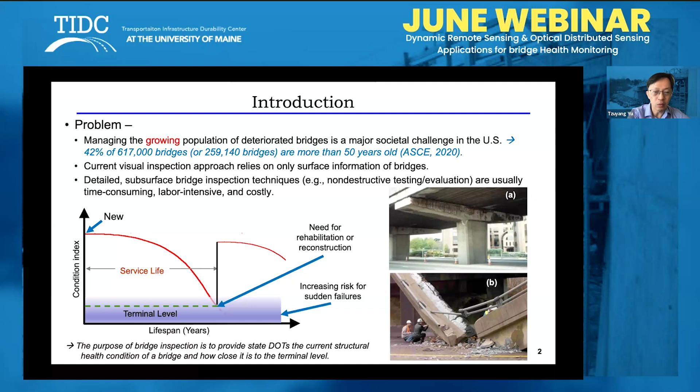Nonetheless, pictures show on the slide that in 2005, this Lakeview Bridge actually collapsed unexpectedly. So that means we could do a better job with infrastructure sensing, because as researchers and also for the stakeholders, the condition of our civil infrastructure was not properly controlled or known by our stakeholders.

Therefore, bridge health monitoring is a very powerful and beneficial technique that can help these governments to reduce the risk of these kinds of failures, as well as help structural engineers improve their design knowledge. Shown here are just a number of applications that we can learn by using bridge health monitoring.

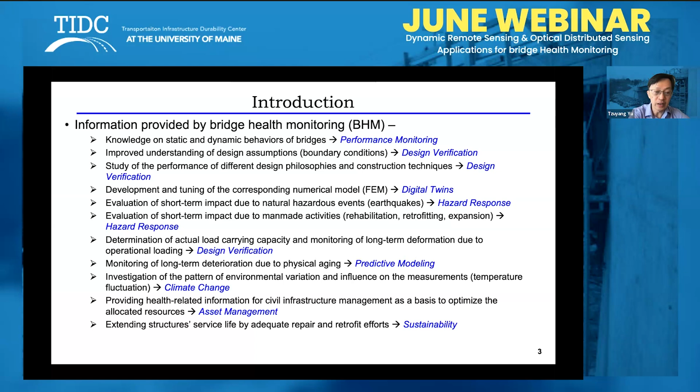And among them, predictive modeling is what we focus our research on, because the purpose of health monitoring is to be able to predict the condition of the bridge in the future. Therefore, having a time-dependent model regarding the structural properties of the bridge is essential to the success and the value of bridge health monitoring. Now, in the big picture, this information can help the stakeholders achieve more efficient and better asset management.

Bridge health monitoring is one type of structural health monitoring. So if you look at the components of structural health monitoring systems, all these components still apply to bridge health monitoring. There's the data acquisition. Today we use remote sensing or smart sensors to collect the response from the structure. And there must be a power supply component. The data transmission could be wireless or through a wired approach. And there's the data storage, processing, mining, and interpretation.

With the advancements of different technologies, digital twin has gradually evolved into the two components for structural health monitoring. Very soon we can expect that all these infrastructure systems should have a digital version such that engineers can have a better idea about what is going on with these bridges.

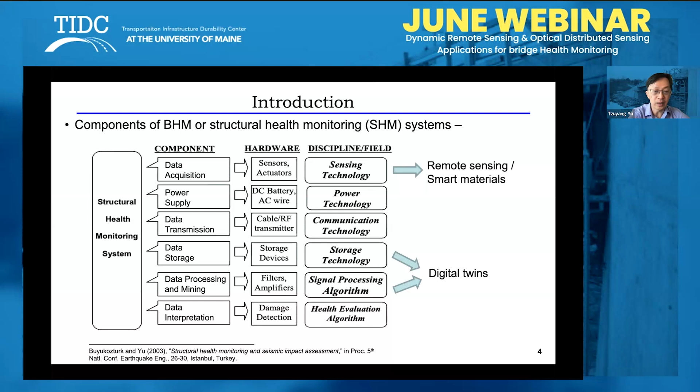Another overview about the existing remote sensing technologies. There are many different classifications of remote sensing technologies. And in our perspective, we can categorize them into portable and mobile ones. So what's the difference? The portable ones means that the sensors are under strong human supervision. The mobile ones means that the sensors are collecting data under indirect human supervision.

Portable supervision means that the inspectors will have the flexibility to decide and refine the measurements, because the decision was made at the time of inspection. But mobile inspection using drones or other types of moving platforms will require a pre-designed inspection route in order for the inspection to be finished within a given amount of time and with expected resolution.

Now, shown here are two different examples. One is the use of infrared thermography, and the other one is a laser Doppler vibrometer. Thermal infrared thermography is a good example to show how we can use remote sensing to obtain high-resolution surface condition. But a laser Doppler vibrometer actually can give us a little more in-depth understanding of the structural properties, because the surface information must be correlated to the subsurface condition in order to understand how a structure ages.

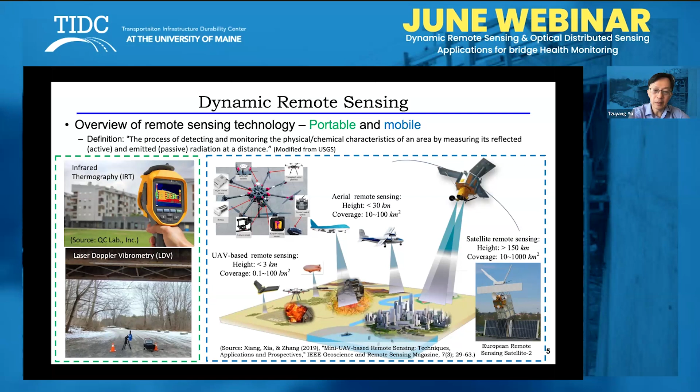When it applies to bridge health monitoring, remote sensing technologies have also been widely applied to different kinds of components and different parts of a bridge. What we can see here is that ground-based systems and more detailed inspection for subsurface condition have already been applied. But if you fly a small UAS, you can actually use LiDAR or GPR to generate the digital version and have the radar-based image of the entire structure.

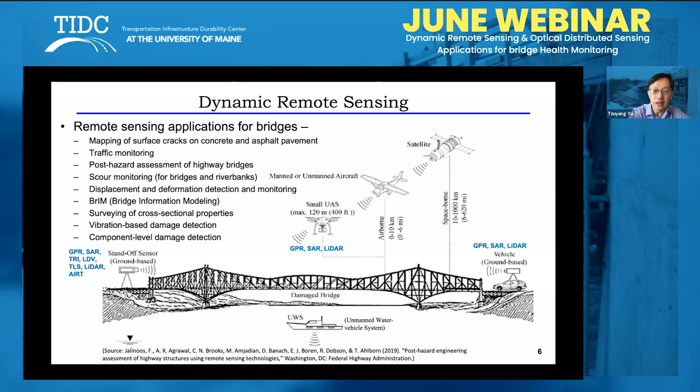To inspect the bridge piers or the underwater foundations, unmanned water vehicle systems will be required. Of course, to improve the inspection efficiency, airborne systems were actually the first applied in bridge health monitoring.

Now, if we look at these existing technologies, they are essentially using two different types of waves. They are either mechanical waves or electromagnetic waves. For mechanical waves, the most popular approaches are acoustic emission and ultrasonic testing. They are basically using the vibrations and transmissions of mechanical waves. And by measuring this surface mechanical response, we correlate this response to the presence of subsurface or surface defects on the bridge. But electromagnetic waves can be used to obtain the subsurface condition of concrete structures.

Now, among these different methods, either mechanical or electromagnetic, we can even see them as either actively probing into the bridge or passively collecting the response of a bridge under, for example, traffic excitation. So this slide here is just to prepare the audience to have a broader understanding of the diversity in existing remote sensing technologies for bridge health monitoring.

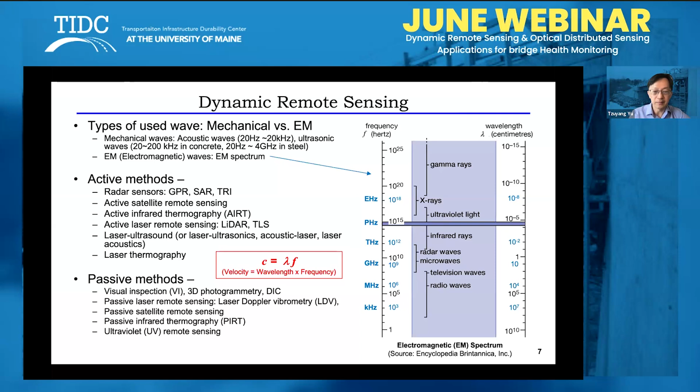Now, in this talk, our focus is on the use of laser Doppler vibrometer. Now, the principles of a laser, for those who do not have much experience with a laser: essentially it's by exciting an element from the ground state to the excited state. And depending on the type of element, when this excited state is gradually reduced to the ground state, different types of electrons or photons will be released. Now, by generating this resonant response of these photons or electrons, a laser beam will be generated.

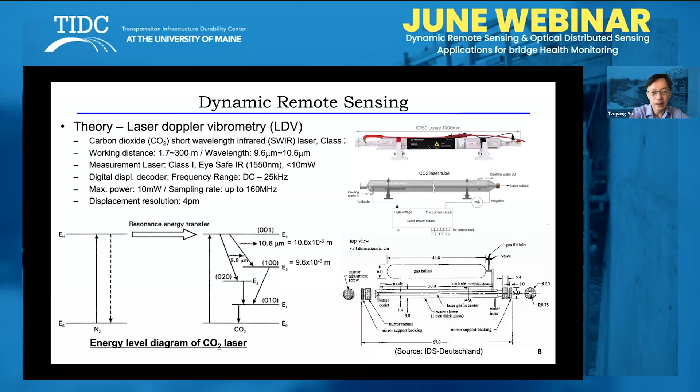The fundamental principle of laser Doppler vibrometry is based on what we call the Doppler shift effect. The Doppler shift effect is a well-known effect that many of us have learned even as early as in high school. So when the object is moving toward the laser, the frequency will be increased and the wavelength will be reduced. This is what we call the blue shift. And the opposite of the blue shift is a red shift. So from this Doppler shift effect, we can easily correlate the frequency change to the velocity of the object.

Therefore, in the LDV, the direct measurement is the velocity. If we continuously collect the velocity over time, we can generate a velocity time graph. And by integrating this velocity time graph, we can obtain the displacement response. Or if you differentiate the velocity time graph, you can get an acceleration time response.

The system we use in this particular application is a commercial unit. It uses short wavelength infrared, which means that the laser beam is not visible to human eyes. However, we equipped this LDV with a visible laser. Therefore, when we deploy it, there will be a visible green spot to help the inspectors identify the location of the inspection in the field. This system is ideal for far field measurements, so our application is well within the range for this particular LDV.

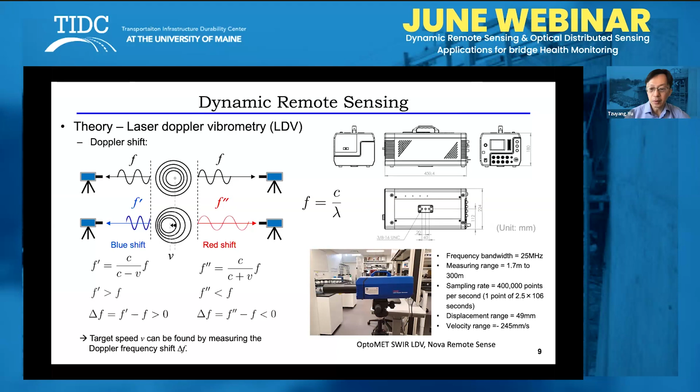The bridge we selected for demonstrating our health monitoring technique is at the border of New Hampshire and Maine. It's the Salmon Falls River Bridge, and it has a main span of about 65 feet. But the age was actually uncertain; the next slide will explain why. It's basically a steel girder bridge, and the foundation was mostly masonry and perhaps partially concrete.

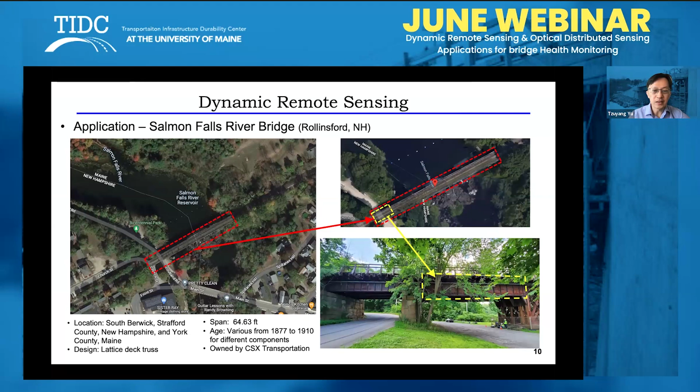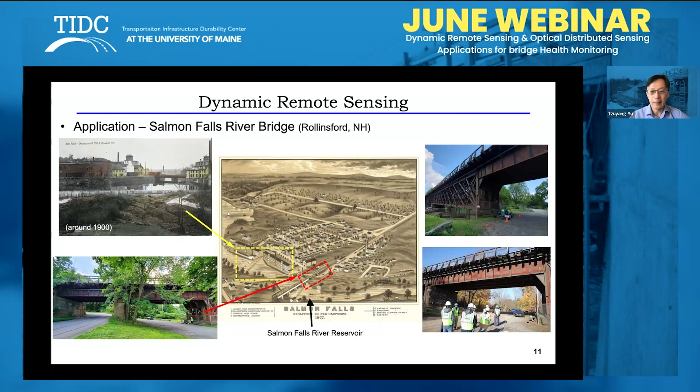The reason we said the age was uncertain was because when we performed the health monitoring, we looked into the records of this bridge. Some of the bridge records show that this bridge was built around the turn of the 20th century. However, there's a map showing that the bridge was there since 1877. So we believe the foundation was older than 1877, but the superstructure was rebuilt perhaps around 1910. So that gives us some idea about how old this bridge was.

A major reason for choosing this particular bridge was the convenience of performing this kind of under-bridge inspection. This bridge was located at the junction of two major roads, but there's another road passing by, such that most of the traffic will not be going underneath this bridge. There's only a recreational park that connects to this road. So that gives us a lot of flexibility in data collection.

Because of that, we chose the midspan and positioned our LDV at 90 degrees, such that we can take direct and perpendicular measurements at the midspan. On the slide, you can also see the green spot showing the location of the LDV beam.

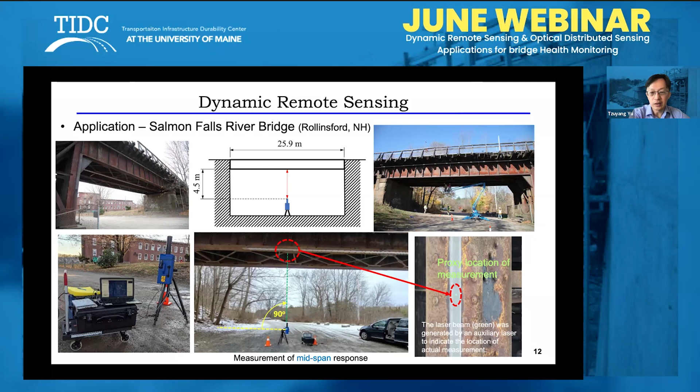So let's take a look at what the raw data look like. First of all, we have the velocity time response. What we must do as a first step is to understand the background vibration signal. This was achieved by integrating the velocity time response in the time domain. But this integration is associated with a well-known problem, which we call the rigid body motion. When you integrate the velocity into displacement, you can see the drifting of the displacement response. So this is the rigid body motion.

In the frequency domain, it is manifested by a large zero frequency component. This zero frequency component is not a real signal, so it must be ignored or even removed before we proceed with further signal processing. But from the frequency response of the displacement, we can see that there's a major frequency component at 55.67 Hertz. And this frequency component was the vortex-induced vibration from the river.

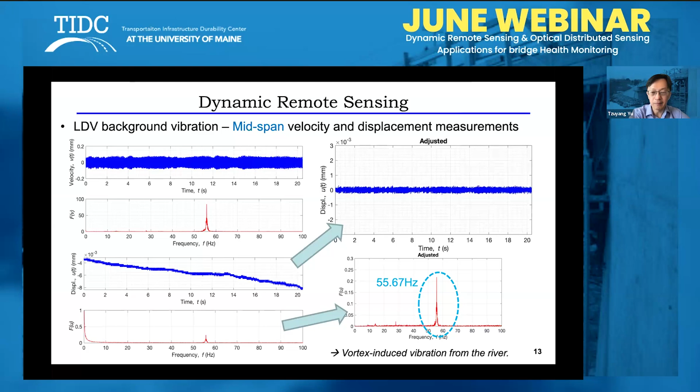In order to extract the dynamic properties of the bridge, we rely on the traffic-induced vibration. In this case, there is an Amtrak Downeaster train that has 6 to 7 train schedules every day. So we were there and waited to capture the loaded and the forced response of the steel bridge due to this Amtrak Downeaster train.

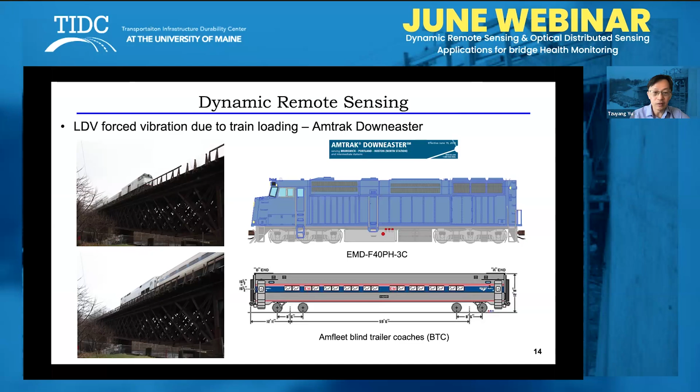And from the information on the MBTA, we found out this train model and also the passenger train model. So the dimensions of the locomotives and the passenger trains can be found. Now, by taking a look at the total response, converting the velocity time response to the displacement time response, our second step is to use the displacement time response to separate the forced response from the free vibration. And then we process the forced response to get some parameters that we move to the free vibration response. Showing here are the time domain and the frequency domain curves of the velocity response and the displacement response.

Now, an interesting thing about this response was when we take a look at the forced response and the free vibration response, this is the result we got. At the time when we collect the forced response due to this locomotive train, we saw there are 2 locomotives. But in the displacement response, we only have 4 peaks. The reason why I call this interesting was at the time when we measure the dynamic displacement response using the LDV, there were actually 5 passenger trains. So it was puzzling to us why the 5 passenger trains only resulted in 4 peaks when the 2 locomotives generated 2 distinguished peaks, as we clearly see here.

The reason is what we call the dynamic hysteresis response. That's because when the heavy load is moving, in this case a heavy load but with distributed axle loads, the center of gravity actually was slowly shifted toward the end of a distributed load. Therefore, while we can see there are 4 peaks representing the passenger trains, these peaks are not at the center of these passenger trains. They were actually at the joints of 2 passenger trains. Hence the 4 peaks for 5 passenger trains.

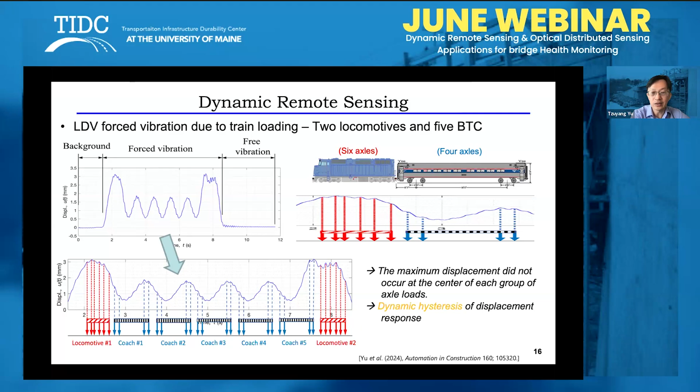Now, when we use this response, we have to use the displacement measurement in order to calculate stiffness. Therefore, we actually need to use the displacement values at individual axle loads and use these axle loads to calculate the stiffness of the bridge. For structural engineers, this could be some tedious work because every individual load is not created by a single axle load. It was actually the combined effect of whatever axle loads were on the bridge at the time. So to do that, we will need to know the dimensions very precisely and very accurately. And for train loadings, this was actually possible because we have the dimensions of these trains.

So the first thing we did before we calculated mass, damping, and stiffness was to estimate the velocity because the measurement was in time domain. And if we know the distance between any axles, then you can use the peak-to-peak distance and also the time information to calculate the average velocity. So the first global information we obtained was actually the velocity of the train. And in this case, the average velocity of the train was about 56 miles per hour. And the limit was 73 miles per hour. So at least we knew that this train did not speed at the time.

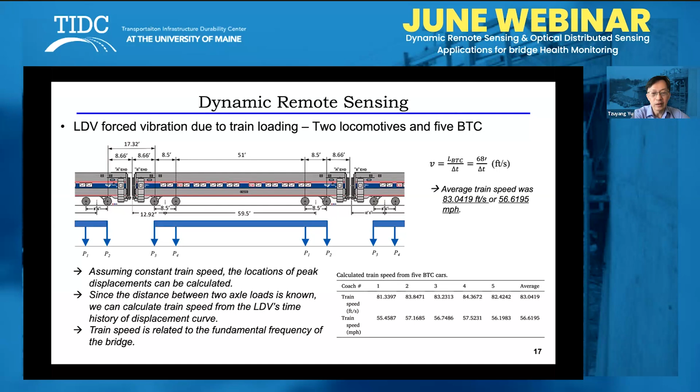Now the next step is to separate the forced response from the free vibration, because we want to use the free vibration to get some parameters. And this separation has to be done with care because the end of the forced vibration and the beginning of the free vibration sometimes will overlap. And if we accidentally include the wrong components from the forced vibration into the free vibration, your spectrum response in the free vibration could be misleading. So we use the frequency domain method to separate the forced response from the free vibration response. By doing so, we get the spectrum response of the free vibration.

Now, once we have this step, we also have to make sure that we only use a single mode vibration to calculate the damping, because the attenuation curve that we are looking at here on the slide actually contains multiple modes. If in the free vibration there are multiple modes present, this attenuation curve cannot be used to calculate the damping ratio, as we know from structural dynamics. Therefore, the next step is to remove the influence of all other modes by keeping the desired modes present and then convert it back to the time domain.

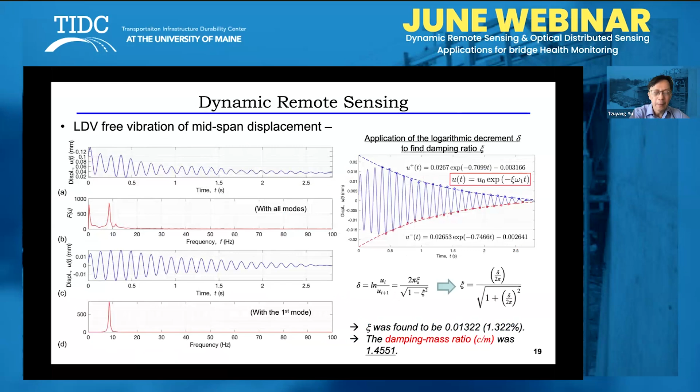In this case, we found that the first undamped fundamental mode was actually at 8.698 Hertz. Now, in order to calculate damping, we will have to convert the frequency spectrum curve in figure B into figure D.

In figure B here, the spectrum curve actually has multiple modes with all the modes that we measure from the free vibration. In order to get the clean single mode response, we use a double Gaussian filter to remove all other modes. With only the first mode present, then you convert this modal curve back into the time domain. And that's how we have the result on the right of the slide.

And why do we need this curve? Because we want to use the attenuation curve to calculate the damping coefficient. The first thing you will calculate is the damping mass ratio, or C/M. And another reason for using this kind of time domain technique, as opposed to other frequency domain techniques to determine damping, is because if you have the time domain curves here, we actually have two sets of boundary conditions. You have the positive peaks and also the negative peaks.

By curve fitting, we found that the positive peaks and the negative peaks curves showed a very close agreement, giving us the confidence that the damping mass ratio that we obtained from this calculation was correct. In this case, we found that the damping mass ratio was 1.4551.

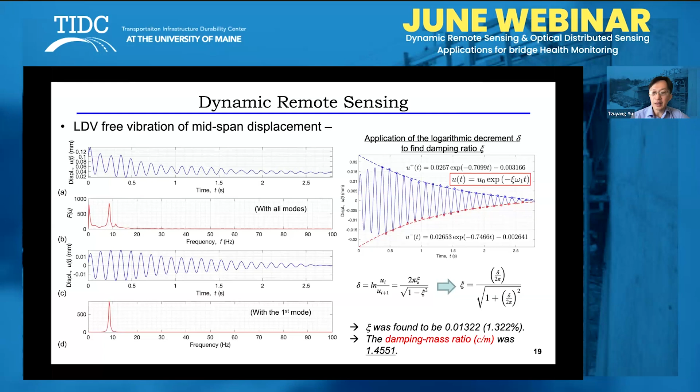Now, once we have the damping mass ratio, the next thing we can calculate is the stiffness mass ratio. So far, all we have is just ratios. We have damping to mass ratio, stiffness to mass ratio. And this stiffness to mass ratio can be directly calculated from the fundamental frequency. So what should we do next?

The next thing we should do is to calculate the absolute value for the stiffness. Because once we have the value for the stiffness, you can calculate mass from the stiffness mass ratio. And if you have the mass, then you can use mass to calculate damping from the damping mass ratio. So this is essentially our approach.

But there's one problem. When we collect the data from this bridge, we have no information about the dead loads, meaning that we do not know how heavy those locomotives were. Neither do we know how heavy or the distribution of the loads of those passenger trains, because MBTA does not keep information on how many passengers were in those passenger trains. Furthermore, we have no way to control the passengers to stay at a fixed location. So it is possible that the passengers could actually walk and sit at different seats.

That's why we propose an approach to address those uncertainties, and this is what we call the bounding approach. So what's the bounding approach here? In the bounding approach, we assume that the locomotives were full weight. This, of course, was not true. But by assuming that the locomotives were full tank, that is the heaviest weight ever possible for the locomotives, we will get the lower bound values. For the passenger trains, we assume that they're empty.

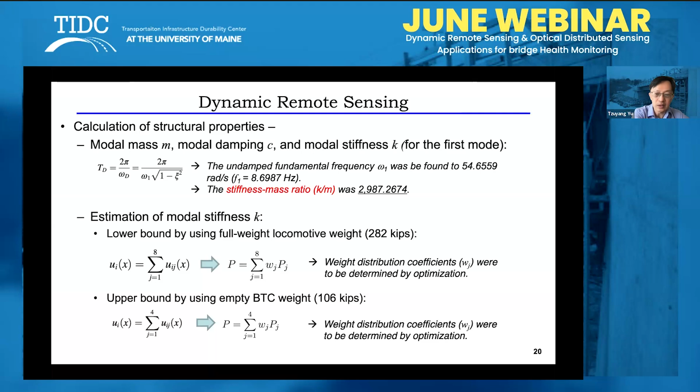So let's get on to the stiffness calculation. This is essentially a structural analysis problem, but it's a dynamic one. What we need to take into account here is that at the location of, for instance, the first peak, this was the first axle load at the midspan of the bridge. But this load was not caused by only the first axle load. It was actually caused by the combination of whatever axle loads were on the bridge. And that was a dynamic situation because with the moving of the locomotives, this load combination actually changes.

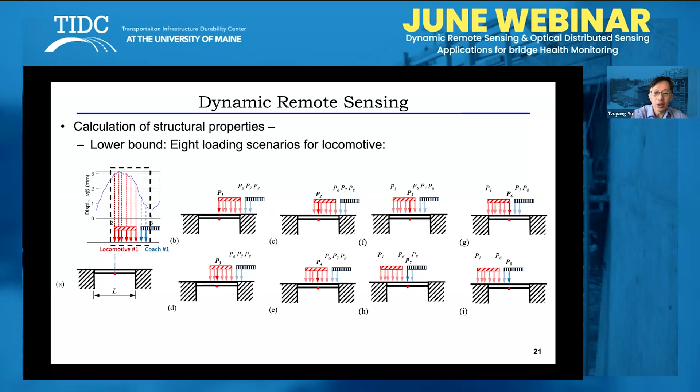What is shown here in picture B is that when the first axle load was at the midspan, there was only the locomotive on this bridge, meaning that the bridge had not yet felt the weight of the first passenger train. But with the moving of the locomotive to, for example, the third or the fourth axle loads of the locomotive, the passenger train's axle loads start participating in the force response. And that's what we meant by this calculation having to be done in the dynamic scenario, because the load combinations are changing over time.

With the same idea, to determine the upper bound values, you will have to consider the different loading scenarios. For instance, here, for the first peak load from the locomotives, we choose the third axle load because the third and the fourth axle loads of the first passenger train were actually close to the first two axle loads of the second passenger train. And this is reflected in our dynamic response.

We are essentially leveraging the peak response to calculate the load combinations. And we can repeat the same scenario for the other three peaks in order to have a statistical understanding of the load distribution. Similarly, in this case, you can see that there are 4 different load combinations representing individual load responses in the displacement curves.

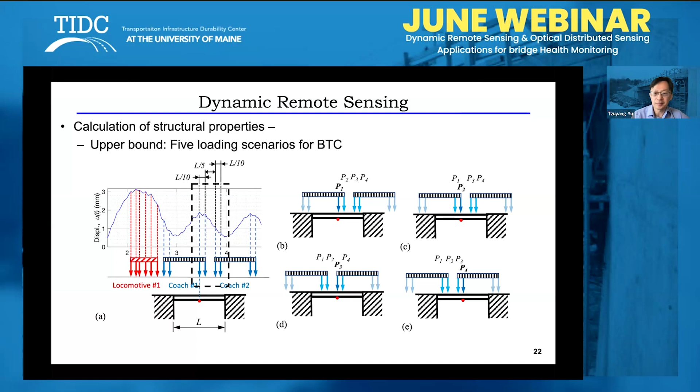Now, once we have these responses and curves, what we have to do is run the optimization. And this optimization is based on the unknown weight distribution coefficients, because we did not know the distribution of the weights among the axles. So in the upper bound calculation, there are 4 axle weights per passenger train. That means there are 4 weight distribution coefficients.

For the locomotives, the problem gets a little bit complicated because you have to consider there are 2 other axle loads coming from the passenger trains. A locomotive, in this case, has 6 axle loads. But in the response that we have, you have to consider the first 2 axle loads from the passenger car. And the optimization gives us the final result, which is shown here. That means that for the passenger train, the majority of the load was actually in the first part of the passenger train. For the locomotive, similar findings were found in this result.

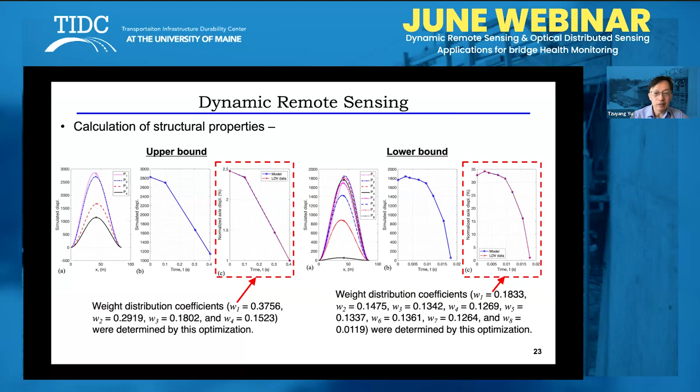So instead of finding a single value as in any kind of damage detection system, we actually found a range, which is the upper bound value and the lower bound value. So after calculating the stiffness, we use it to determine the mass and use it to calculate the damping. Therefore, this result tells us that the range or the width between the upper bound value and the lower bound value was only 4.485% of the lower bound value.

And this gives us great confidence in believing that this approach can actually help us monitor the degradation of the structure. What we expect is that in the future, this range may shift over time and indicate the change of the structural condition of a real structure.

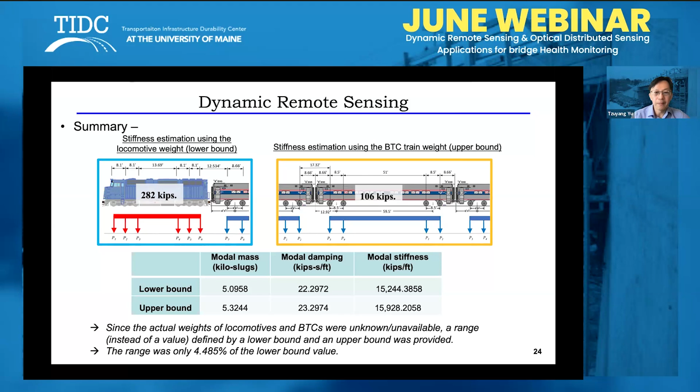Now, let's talk about the second technique, which is distributed optical sensing. I'm going to let my colleague, Professor Xingwei Wang, talk about this first. Thank you, Tzuyang. So this sensing textile is a very interesting technology. The advantage is that it can embed, for example, optical fiber distributed sensors into the textile. It can have multiple parameter measurements at the same time, and can also apply to large area structures, for example, the bridge here.

So in this slide, you can see pictures of this sensing textile. We can design different kinds of patterns based on the requirements. And thanks to Saint-Gobain, who actually helped us do this manufacturing. So this video shows them embedding these fiber sensors in textile in real time. Next slide, please.

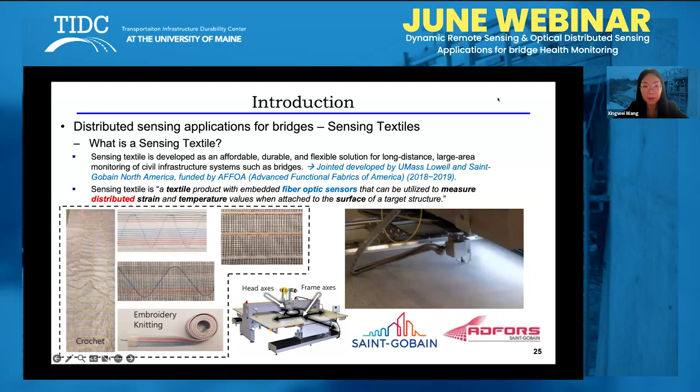Thank you. So in this sensing textile, we can embed different kinds of sensors, including BOTDR or BOTDA, which can measure a long distance, up to, let's say, 80 kilometers or even 100 kilometers, with 1 meter spatial resolution. Or OFDR, which has 30 or 50 meter long measurement, but with sub-millimeter spatial resolution, a very high resolution measurement. It can include FBG sensors, which can have hundreds or even 1,000 sensing points in the fiber, and also DAS sensors, which are very good for dynamic measurements. Next slide, please.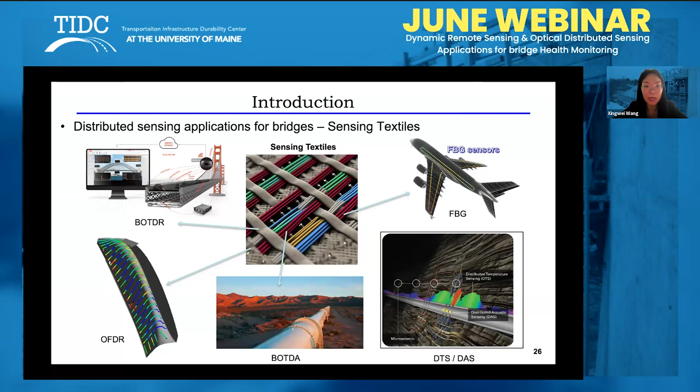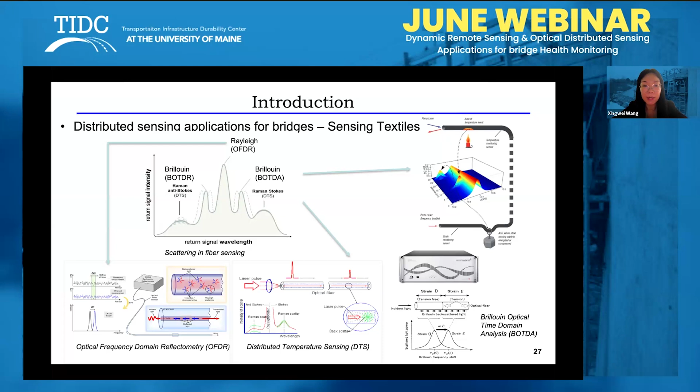Here is just a very brief introduction to how this works. We all know that when light travels in the fiber, it will have some scattering. The well-known scattering is the middle one here, Rayleigh scattering, and based on that, people developed the OFDR sensor. Based on Brillouin scattering, people developed BOTDR or BOTDA measurement, which can measure both strain and temperature. And based on Raman scattering, we can develop the DTS sensor, mainly focused on temperature measurement. All these have fully distributed sensing capability, which means that along the fiber, you have many points of sensing measurements. Next slide, please.

And here we were actually very lucky to have the opportunity to conduct a few tests in Maine, collaborating with Maine DOT, AIT Bridges, and UMaine. The sensing textiles were installed and tested in an FRP composite bridge in Hampden, Maine.

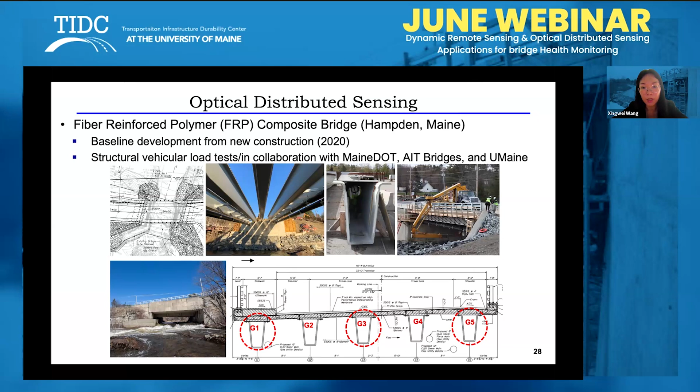Next slide, please. And so back in 2020, our team, UMass Lowell and UMaine together, installed this sensing textile. You can see the students unrolling the sensing textile inside this girder before the girders were built into the bridge. And then after 1 month, we also went back to do the measurement on the baseline.

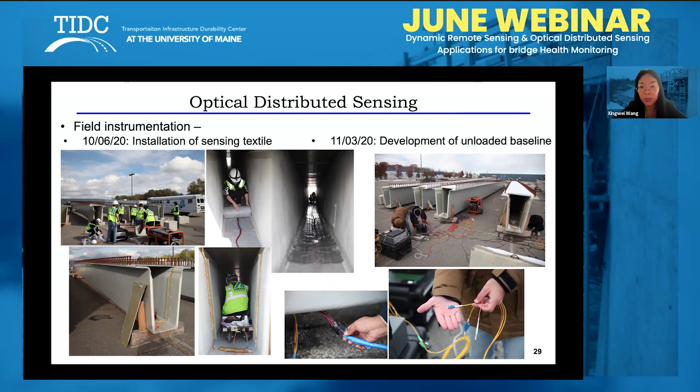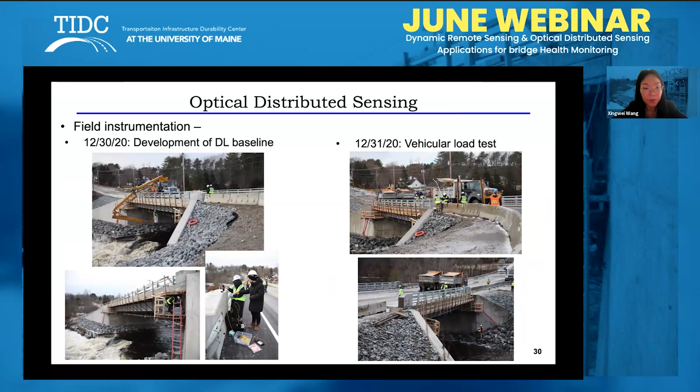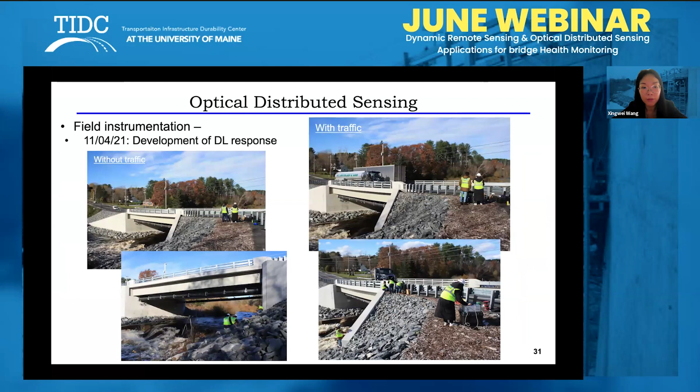Next slide, please. And then after, you can see that the bridge was built using these girders, we did another measurement on the baseline and then conducted this vehicle loading test. Next slide, please. And then 1 year later in 2021, we went back to do another test with the traffic on the right and also without the traffic on the left. You can see the pictures.

Next slide, please. And then here are some results. So as we said, for this test, we use the BOTDA, and BOTDR and BOTDA can measure both the strain and temperature at the same time. These results show the strain distribution, and the x-axis is the distance. The light blue one here, zoomed in the bottom figure, shows the strain distribution where the sensing textile was installed inside this girder on the bridge.

And you can see that from October to November, 1 month after the installation, there's some shift that could be caused by the epoxy during drying, and also there are some locations marked here showing uneven epoxy distribution during the installation. Although we tried to use the roller to even out the epoxy, because it's manual installation there are still some points, but the sensor can find out where those locations are.

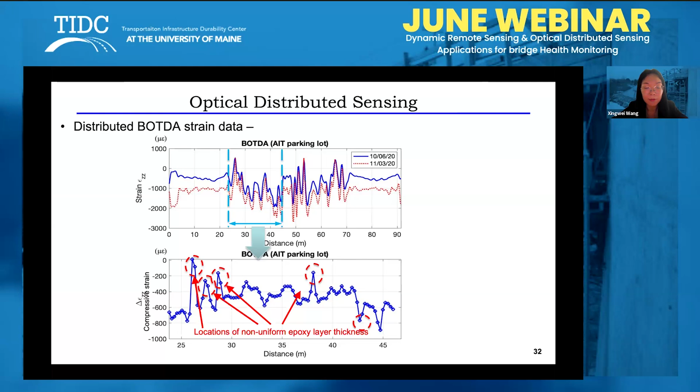Next slide, please. And in this slide, you can see through this sensing textile, from 24 to about 45 meters, which is where the sensing textile is inside the bridge, the whole strain distribution. And these experiment results agree pretty well with Professor Yu's group's model analysis, and he will talk about that in the following slides.

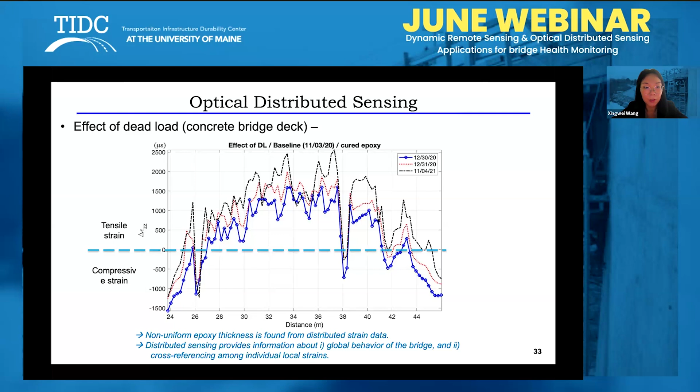Thank you, Xingwei. The problem for health monitoring or system identification at hand is a very challenging and interesting one. It's because from these measurements, we have to consider the unknowns at the support rigidity as well as the unknown values for the EI, even though there are design values from the manufacturer, in this case, AIT Bridges. When we fit the distributed strain measurements with our simplified bridge model, we have to consider that over time the ideal design condition may not be the one as built. And this is actually reflected in our measurements.

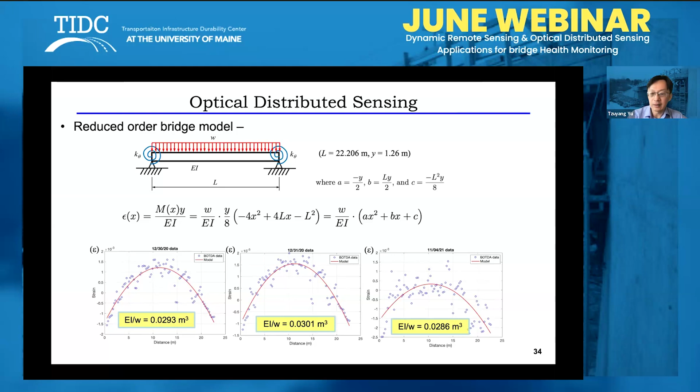So at the beginning, we use a double spring and simply supported uniformly distributed load system to calculate the dead load effects, and use only the dead load effects to extract the flexural rigidity versus dead load ratio. From our preliminary calculations, after the curve fitting, we have 3 different values. The mathematical form for the simplified model is also shown on this slide. After observing the changes, we notice that right after the construction, there are adjustments of the bridge to the support conditions.

But compared with the data set a year later, we found that there's about a 3.7% reduction in the flexural rigidity versus dead load ratio. If we assume that the dead load did not change over time, this change must be due to the flexural rigidity, which is a very important structural parameter for any bridge.

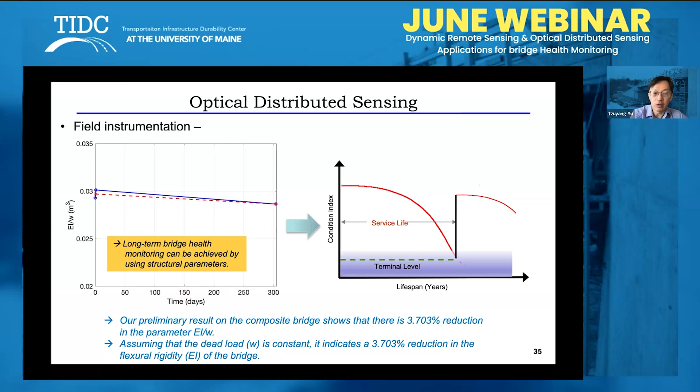And our plan in the future is to continuously monitor this bridge in order to reconstruct this condition index curve over time. Therefore, any meaningful structural health monitoring effort must be long term, because our infrastructure systems do not age overnight. For new construction, they barely age in the first few years, which is why health monitoring really demands an institutional effort, because the lifespan curve cannot be reconstructed unless there's an institutional effort to monitor the structures over a long period of time, such as 50 years or even 70 years.

Now, in conclusion, we would like to share with you, from our field experimental data, we found that there are different options for the bridge health monitoring applications. If you use dynamic remote sensing, in this case, laser Doppler vibrometry, you can actually get the first modal mass, first modal stiffness, and the first modal damping with the approach that we presented here.

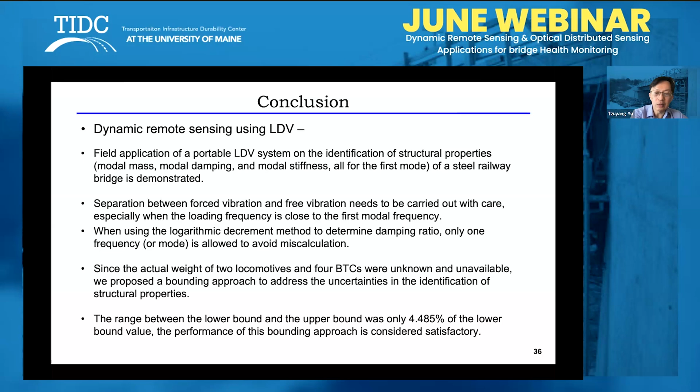And in reality, it is always difficult to actually measure the weight of the structures. Therefore, we believe that the bounding solution will be more meaningful and practical than the single value solutions, because unless you perform a structural load test, you will never be able to know the weight distribution for sure. So we propose to use a bounding solution, meaning that we monitor the change of the bound values and use them to indicate the degradation of structures.

On the other hand, distributed optical sensing technologies using what we propose as sensing textiles give us the confidence that sensing textiles can survive in severe weather conditions, such as the winter in New England. And we plan to continue going back to the bridge and collect annual data and gradually develop this condition index time information, such that we can use them to train our computer models to predict the future degradation of structures.